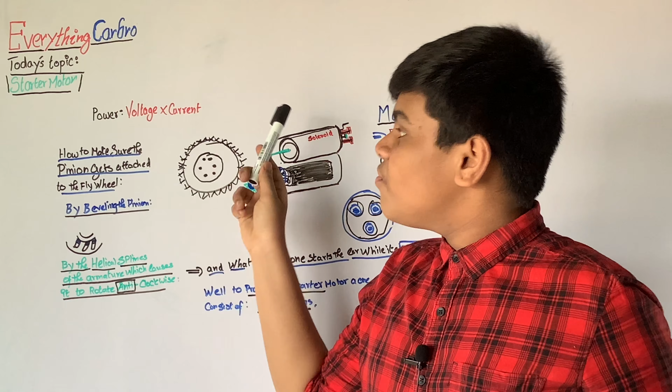That's okay. Starting off, I want to tell you that power is equal to voltage times current. This is not for the engine, this is for the electric motor. So electrics itself, how do you calculate the power for it? In a car we calculate power, which is horsepower, and horsepower has its own derivation of formulas.

For example, torque is equal to force multiplied by distance, which is known as torque. Horsepower is a big derivation, I'll teach you in next week's video or the next video itself.

So power for electric motors is power equals voltage times current. Voltage is different, current is different. I'm just in 8th grade, okay, I don't know that much about voltage and current, but I know the difference between them, they're not the same. We'll see voltage and current in examples, but let's now see that's the power for that one.

This is not how a starter motor looks. If you want to know how a starter motor actually looks, here it is, and here is how it looks when cut open, how it looks inside. I tried to draw as much as possible, and that's how I could get it.

So that's what I wanted to tell you. A starter motor helps to start an engine. Starting an engine is a big process. In the early days, starting your engine was very difficult. Let's go to the history a bit, and then let's start, it won't be boring, I promise.

In the early days, what happened was you have a handle, a specific handle, and that handle is directly connected to the crankshaft. You have to spin it a couple of times to get to the power stroke, because the power stroke is usually the third stroke for everything. Getting through all those strokes, the handle would be unpredictable, sometimes broken limbs, hands, everything was a part of it.

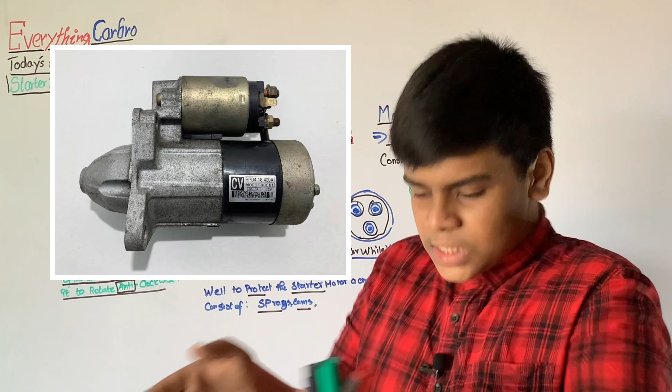That is equal to 400 amps. Okay, I'm writing it here, 400 amps. That's different from voltage. Voltage is different. Current is what? Amps. It's stated in amps. So 400 amps is the take, and that's quite large. You might think 400 amps doesn't matter that much.

Let me let you know one thing first. The 400 amps I'm talking about isn't all current being drawn, it's the temporary starter motor required power. 400 amps is only required on a cold day when the engine is cold and the oils are much thicker, which requires a lot of energy. That's when 400 amps will be taken. But without that, just the 400 amps, how is it achieved?

No part of the car, even the fuel relay system, the fuel pumps, the headlights, the radio, maybe the heated seats and all those features, none of them come close to this 400 amps, or even 200 amps, maybe 200 plus, maybe between 300, that's it. No system or feature in a car comes close to a starter motor or requires as much power as a starter motor.

So this is how on a colder day it takes about 400 amps, but on a hotter day when the engine oil is a lot warmer and you've already started the engine, it may only take 200 to 250, maybe 350 amps maximum. That's all, that's what it is.

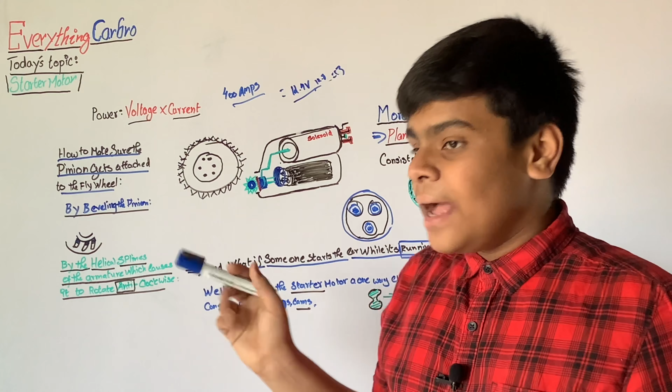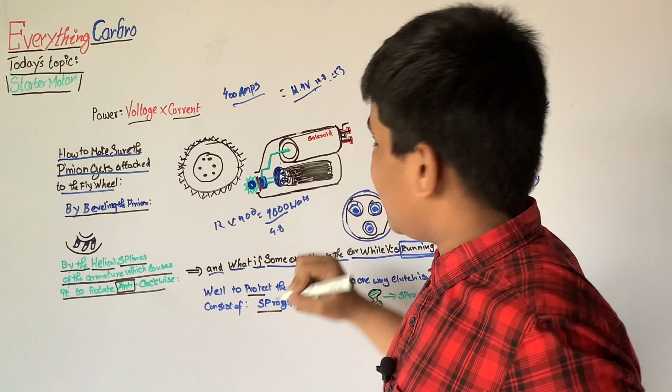Amps are different, I'll tell you later. That's how much volts, and that's how much watts are required. Power equals voltage times current. So let's say 12 times 400, taking the maximum, which is around 4,800 watts, equal to 4.8 kilowatts. That's how it looks. So 4.8 kilowatts is how much power it needs to power up.

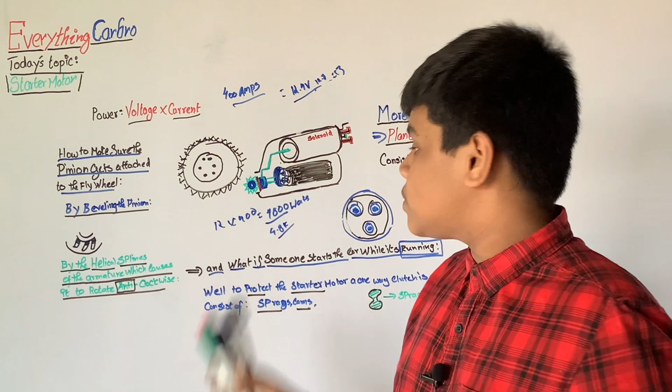So generally electric cars and motors have instant torque, and they are better than engines. That's why instant torque, instant delivery and everything — that's the reason they're better. I do accept it, what to do? As a car guy, I have to accept electrics are best. That's bad for me too, but what to do? So that's what I wanted to tell you.

4.8 kilowatts is the power of this. A general kettle takes about 1.2 kilowatts. That's it, so this is how we calculate watts, the power. Power equals voltage times current. Volts times amps equals watts. Amps and volts together make the power. Note that one, that's how it makes the power.

If you can see now, let's move on to the main thing, to elegantly reduce it, and the starting, I'll show you that, don't worry. So nowadays to start like that, we need wires. Let's say, like I showed you before, the big clunky setup which you didn't want. So to elegantly change it, we have switches.

For example, let's take this Mazda Miata or any other car. Some cars have the battery in the front compartment, meaning the engine bay. Some have it in the rear boot space, in the sides, or maybe even down below. That's different because of weight distribution or something else, maybe they don't have enough space. Sometimes it happens in BMWs too, that's what I wanted to say, so there is some difference.

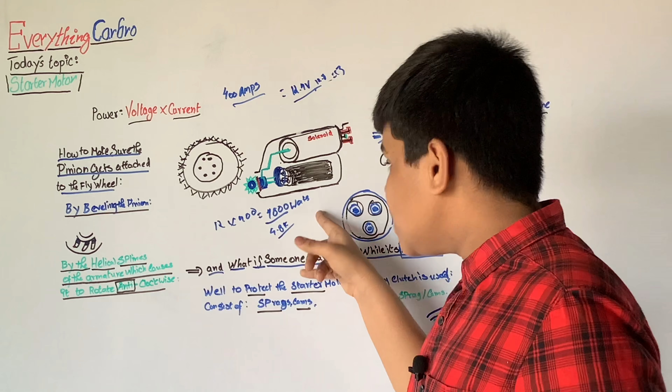So from the rear trunk space, or from the rear trunk to the engine bay — first let me tell you one thing I forgot. The starter motor is located in your transmission bell housing. A bell housing is a covering for the transmission, making sure to protect it from road dust or any water, to make sure water doesn't get inside the transmission casing where it has the throwout bearing.

Next to the bell housing in front, why do I think there are flywheels? A flywheel is required to start the engine. For the particular weight, the power stroke happens only 1 in 4 times for a piston — there are 4 pistons, though I don't know how some have different power strokes, it depends. To keep the engine rotating between strokes, you need a flywheel, both for starting and running the engine. A bad flywheel means your engine doesn't run properly. A flywheel also acts as a balancer, giving balance to the pistons.

When the pistons do the power stroke, reaching between one power stroke and the next, you need the force to keep continuing the rotation - that's why the flywheel is used. That's how the power and the voltage work.

So the starter motor - now let's begin with the solenoid. The reason for a solenoid is because, like I said before, the early 1900s had a big clunky switch, and you don't want that to change this.

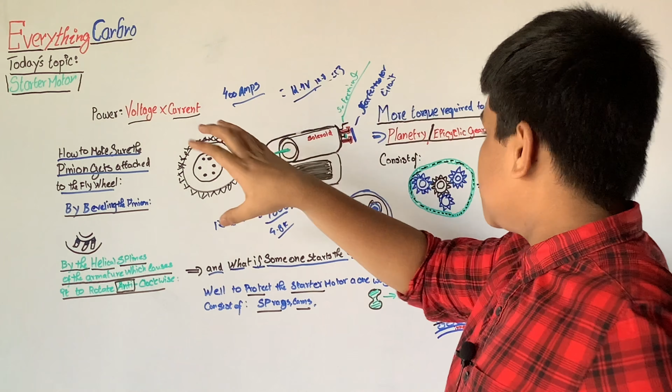This is how a solenoid is used. A solenoid gets a small amount of electric current sent to it, and the solenoid inside has a switch and copper wires inside it. There's a plunger inside that gets pulled in because of the electromagnetic force.

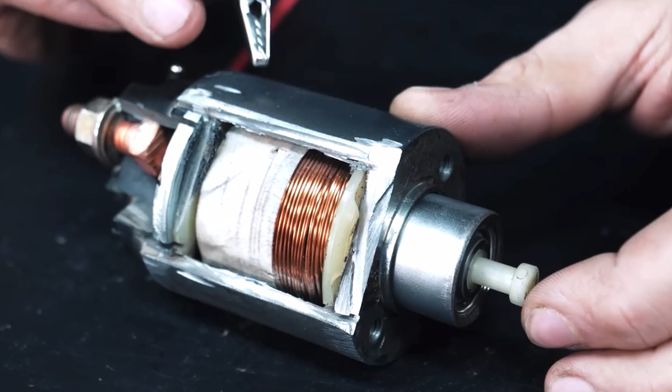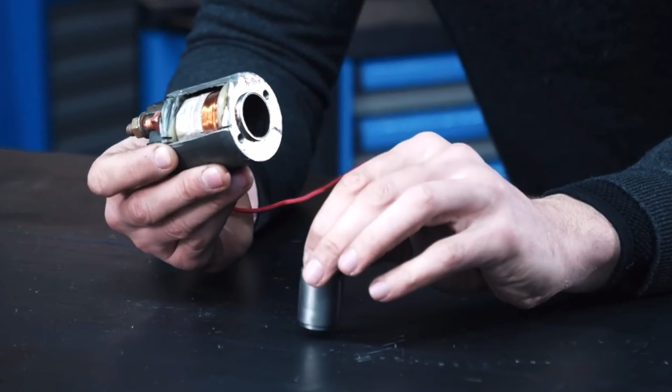This is how it looks, this is how the switch looks, and this is how the plunger is connected to the armature. When being pulled, it hits the switch, which has a copper bridging located there. The copper bridger is attached to the switch, and the switch is being pushed back by the electromagnetic force of the plunger.

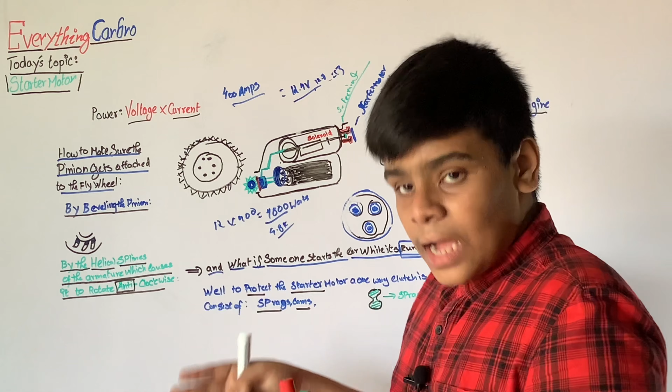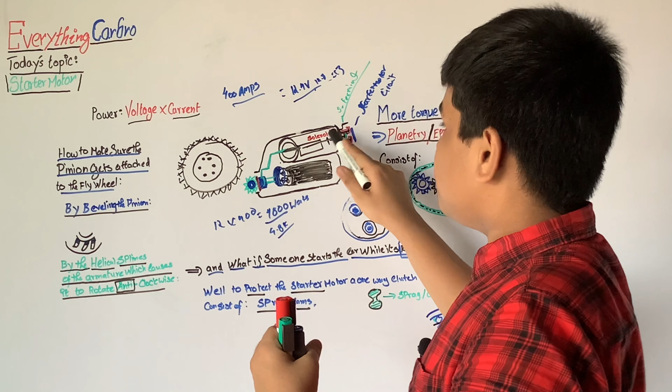It's simple - the plunger gets pulled back by the electromagnetic force of the copper wires, and when the switch is pushed back, the copper wire is bridged by the bridger. This bridges to both terminals, and the terminals are for the positive terminal to spin the starter motor, which is here.

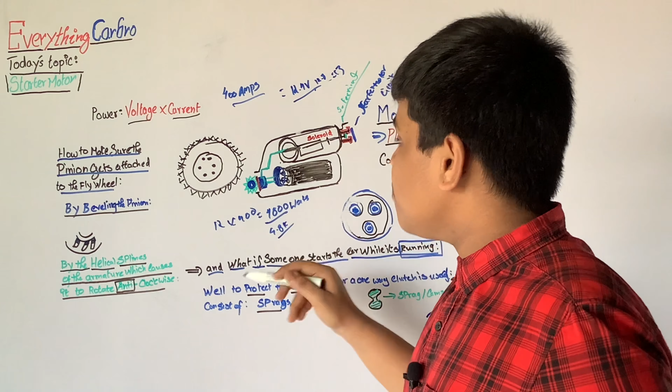This is the starter motor, and this is the solenoid - that's why I've written solenoid here. This gets power, and once this gets powered, it just sends power to the motor. But the amount of torque which it sends to the pinion to rotate the flywheel isn't enough to start the engine.

So the pinion has 8 teeth, and let's say the Miata has 112 teeth in the flywheel. So 112 divided by... 8? 112 by 14? No, 112 by something - I don't know, I just forgot that one.

So the reduction is equal to the number of teeth - the pinion and flywheel reduction formula. The reduction equals the number of teeth in the flywheel divided by the number of teeth in the pinion. That's the formula for the reduction from the pinion to the flywheel. That's how much torque it creates, but that isn't enough.

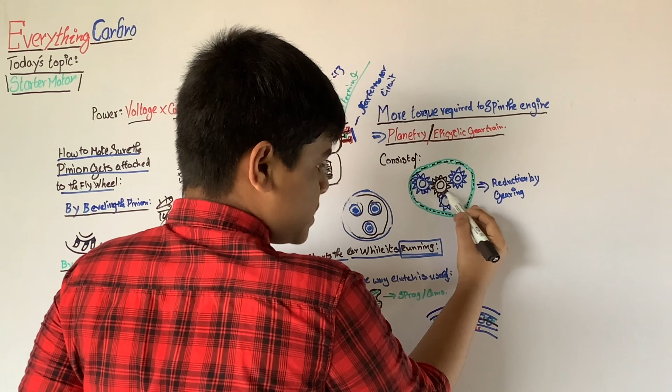So that's why we use a planetary or epicyclic gear system. A planetary or epicyclic gear train consists of a sun gear - this is the sun gear which I've drawn in black color - and these blue gears are planetary gears attached to the ring gear.

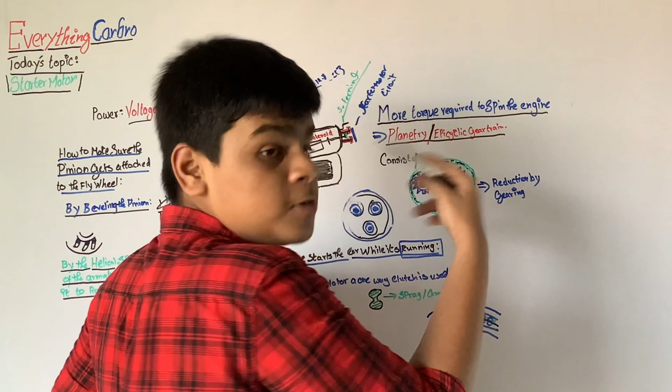So the planetary and epicyclic gearing, that's how it looks. This itself reduces the speed by many times - there are a lot of formulas involved in this. I'm still studying it right now, so I'll make a video in the future about this. This reduces speed a lot, increasing the torque, and then you still have the pinion to the flywheel. Think about how much torque is involved - that's how we can start the engine.

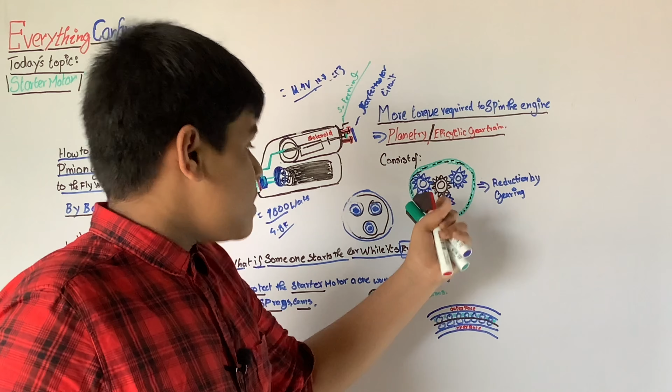Creating these types of things means we can create ring gears and pinions out of cheap metals. Some parts like the ring gears and sun gears can be made of nylon through sintering, etc. That's how it's cheap. You can find this planetary and epicyclic gear train in many things like drills and starter motors.

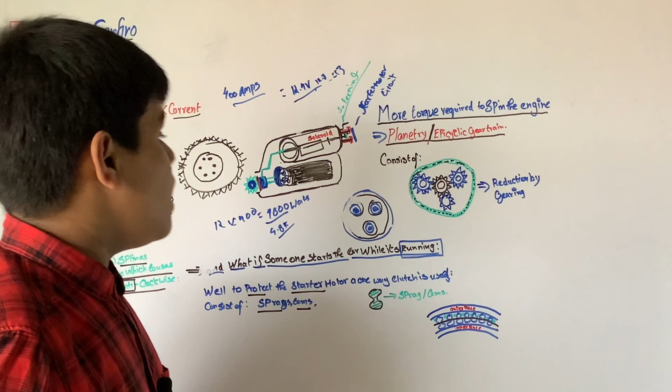That's how a starter motor works, how it looks, and this is how you get enough torque to overcome it. Now we have some problems with the starter motor.

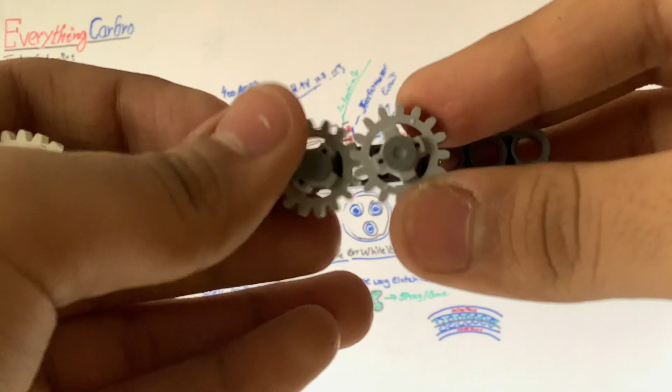The pinion gets engaged with the flywheel. But what if it doesn't get engaged? What if it just slips off? What will you do? For example, it looks like this. Let's say this is the pinion and the flywheel, and they have the same gearing. Let's say this is the teeth. What happens? Think about this.

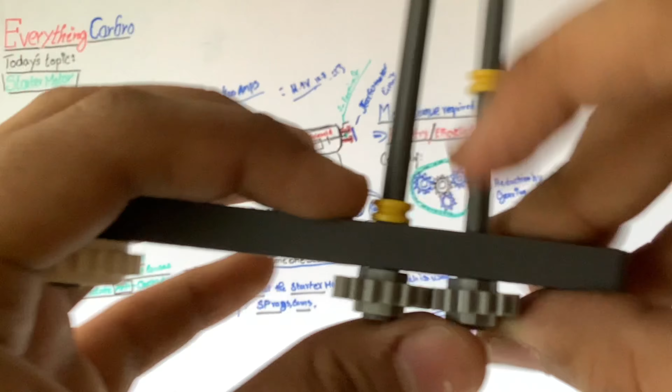Sometimes the flywheel and the pinion, both gears, get hit just like that. That's what I'm coming to say. They just hit together like this. It doesn't merge, there's a space behind, and you can see it pushing all the force, and the teeth just got broke.

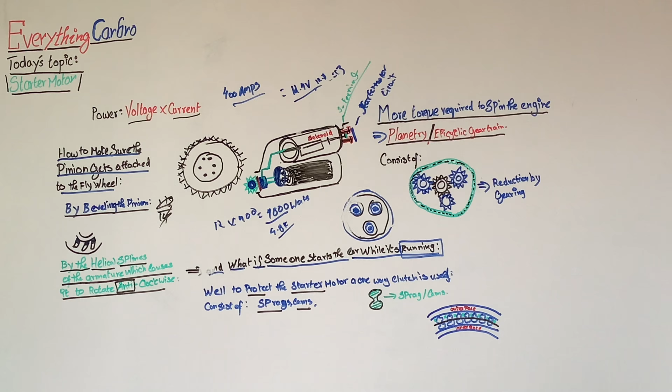How do you avoid this in a flywheel and a pinion? How do you do this? Okay, now let's see about that. That's the reason, see, I just chipped the teeth out of this. I knew about this, that's why there are many inventions.

We car guys, the automobile engineers, we aren't dumb. We are engineers, not dumb.

Now see here, that's what I wanted to tell you. What about making sure the pinion gets attached, not attached, to the flywheel properly? How to make sure? That's what I'm saying, by beveling the pinion.

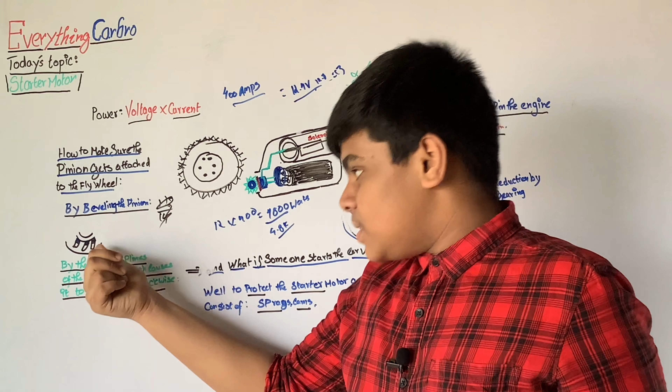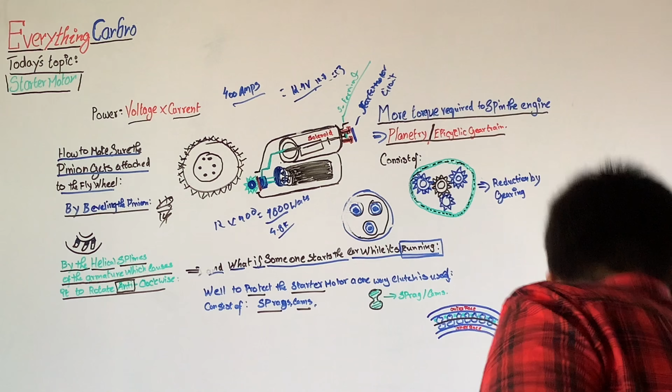It's not possible. But another way is the helical splines of the armature. What is the armature, which I mentioned before? This is the armature, I'm just drawing it once again in black. This is the armature, I'll draw upon it.

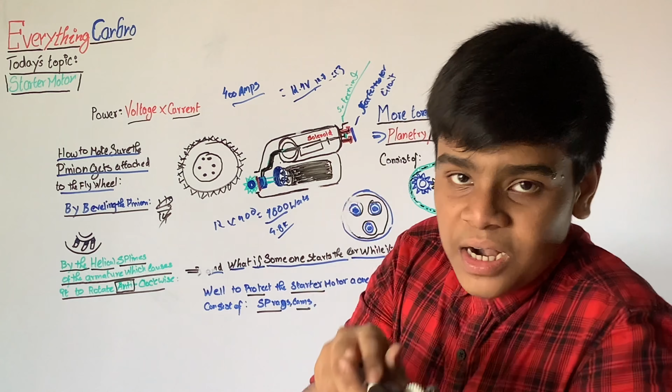So that's the armature. When the armature is connected to the pinion, there is a case with splines in it, helical splines. So when you push it forward, in the helical splines, what happens is the splines move anti-clockwise.

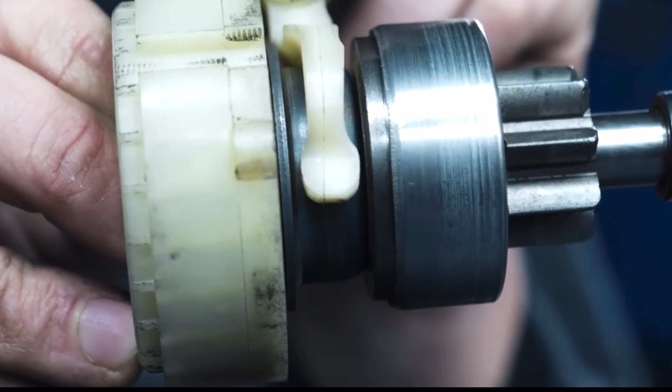And then there's another problem we have to solve. What if someone starts the car while it's running? Starting the car is to make sure it's running. While it's running, if you start it, what does that mean? What happens when you try starting the car once again while it's running?

First of all, let me tell you, in modern day cars it's not even possible. You can't achieve this at all.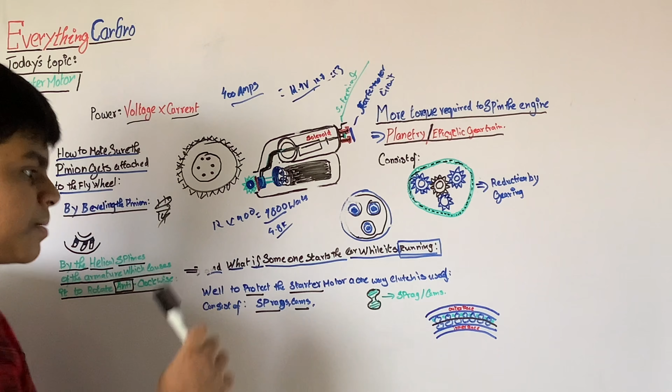That's what I wanted to say. Sometimes there are cases where maybe someone starts it like that and it may cause damage, but in modern cars it's not possible. Even though there is a one-way clutch, I'll explain that one-way clutch, it's not possible at all. So you don't need to worry about that.

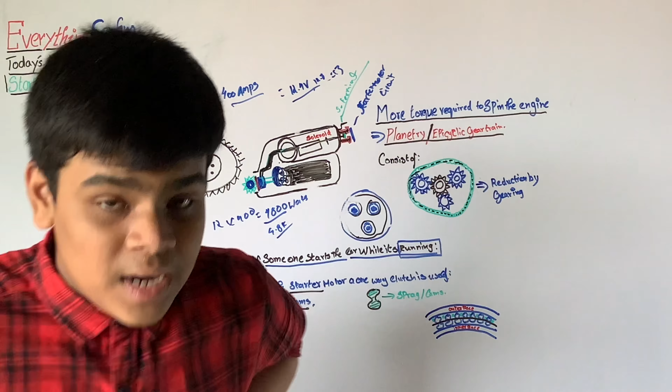How? Let me explain that part. So how to make sure modern day cars don't get started again while running. Modern day cars do this from the early 2000s, and in manuals and automatics you need to be put in park or neutral. It's impossible in a normal car, in a manual car.

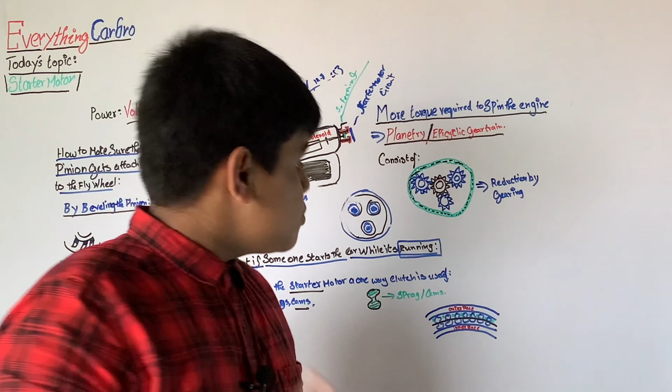Now we are talking about the classic starter motor. So in a manual car, you need to officially press the clutch and make sure you are in neutral to start the car. There is a neutral safety switch.

It's not possible, I don't have enough space, so I'm just showing you. This is my classwork, you can see the relay.

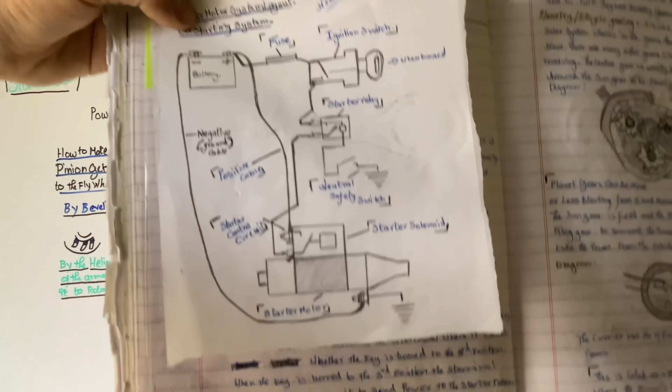That's how it looks. For a manual car, you have the ignition switch with two circuits: one for the ignition part and all the other circuits, and the second one for the starter motor. That's why it separates, see if you can see, separates.

That's why you have the fuse, to make sure it gets the right amount of power. If it overpowers, it will stop, because you don't want detrimental damage to the parts of the car.

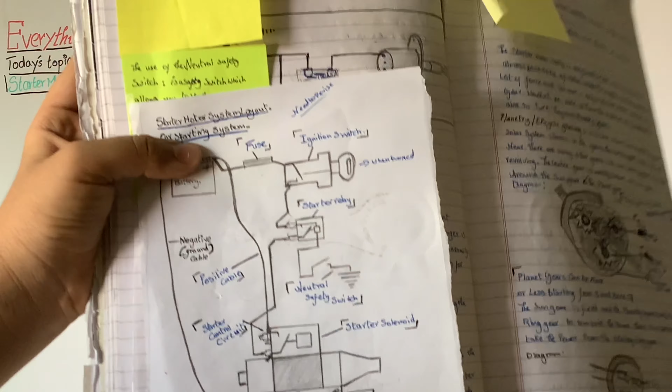So then it moves on to the starter relay and then to the neutral safety switch to make sure it's in neutral. Then if it checks that, the starter relay says okay and the power goes through the starter solenoid and the starter motor officially works.

And the negative terminal, because this is a circuit, the metal body of the starter motor is metal, and it's connected directly to the engine. You can pair it directly to the starter motor and then connect more than 3-4 earthing straps or many, however many you want, depending on the power, from the engine to the chassis, the subframe to the frame itself.

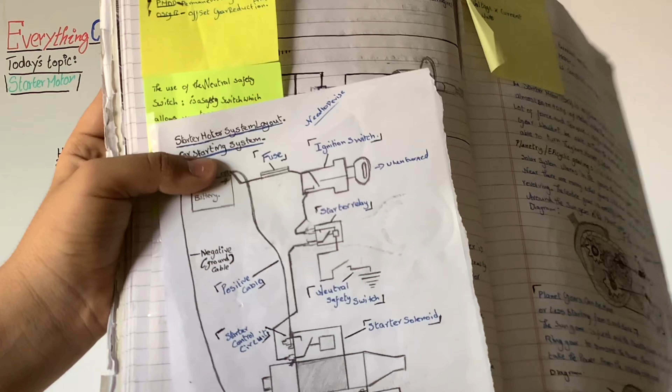Let's say even if you put it in neutral and try starting it while it's running, here's the part: there is a one-way clutch in your car known as a sprag clutch or a cam clutch. A sprag or a cam clutch, that's what it's called, a sprag. That's why we say sprag clutches, or just known as a one-way clutch, and it's located here.

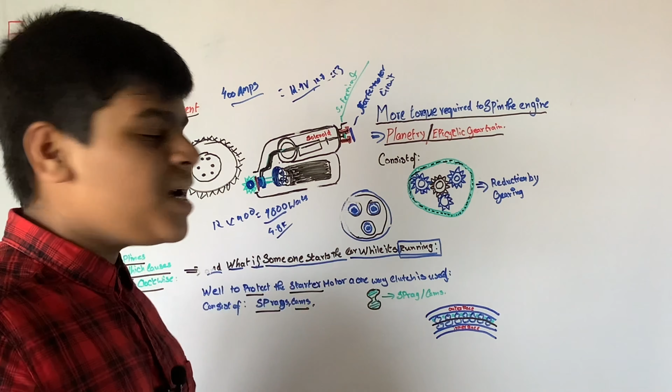You see, I put a red dash right over here, that's where it's located. I couldn't draw in 3D, I'm really sorry about that, but that's where it is located.

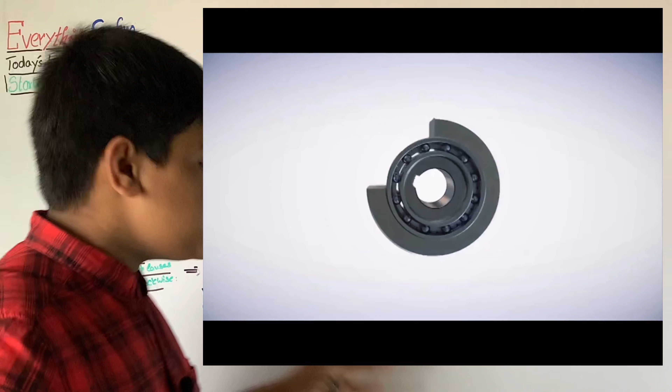You know why? Because first of all, the sprag or the one-way clutch is just like a bearing, it's a bearing actually. So how it looks is that an outer race is connected to the motor, which is the starter motor, and the inner race is connected to the pinion.

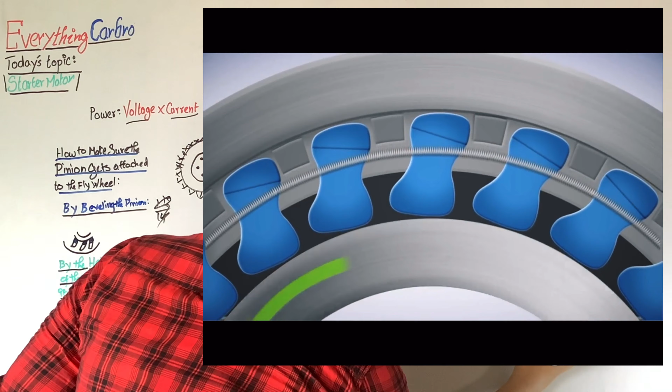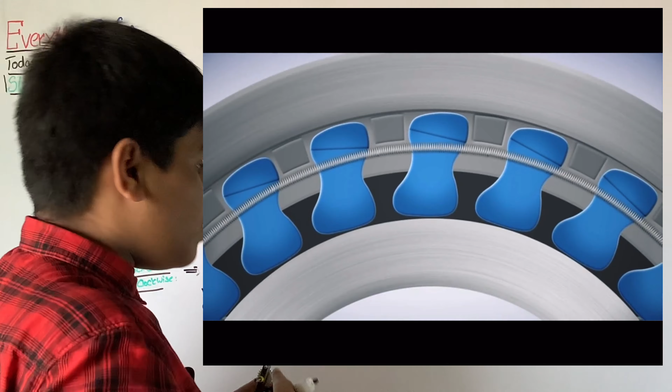When the starter motor spins clockwise, the pinion too spins just like that. I'm showing you this video: what happens is that the sprag tightens up with the inner race and the outer race, jamming them together. When they are wedged or jammed together, then they are connected and they spin.

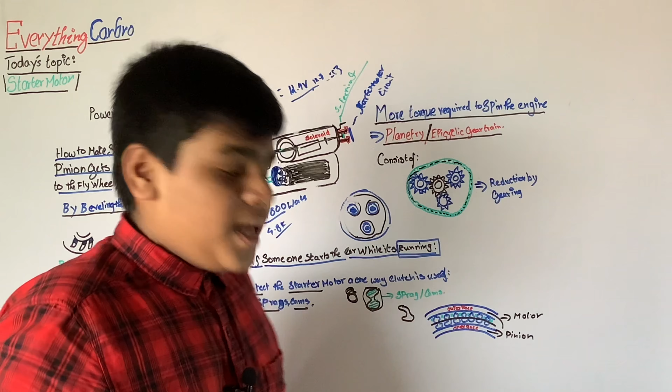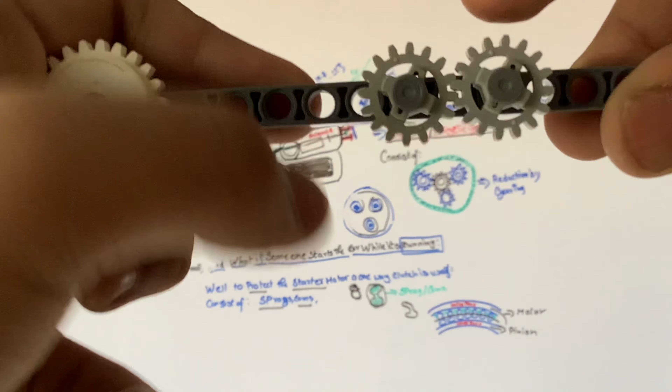If you know, the engine spins anti-clockwise, this is the pinion. When it spins clockwise, see, this spins clockwise. Where does this spin? It spins anti-clockwise. See, I'm spinning it clockwise.

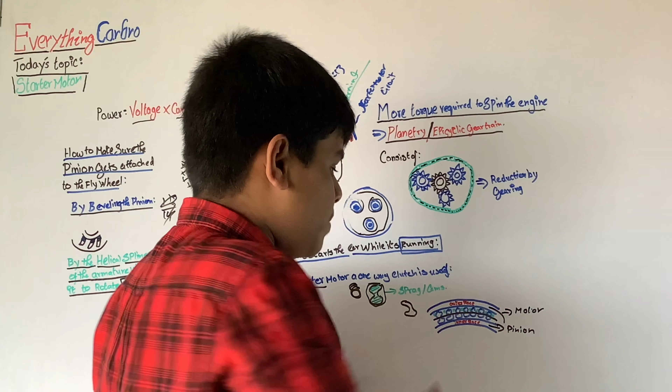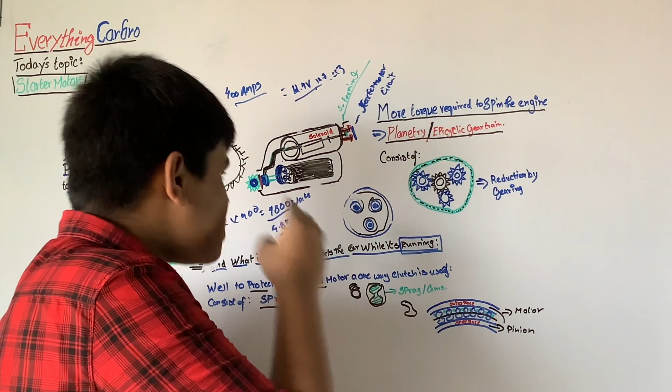When your engine spins anti-clockwise, that immense force, the immense RPM, the torque wouldn't get passed through, because the inner race, when it rotates anti-clockwise and this rotates clockwise, the sprags are loosened. They are not tight, they are not spinning the same direction. So what happens? The inner race, the pinion keeps spinning freely, but it's not possible that the armature and the pinion will get damaged because of the force.

So that's what I wanted to tell you guys this week's video, and that's about the starter motor. Hope you like this week's video.